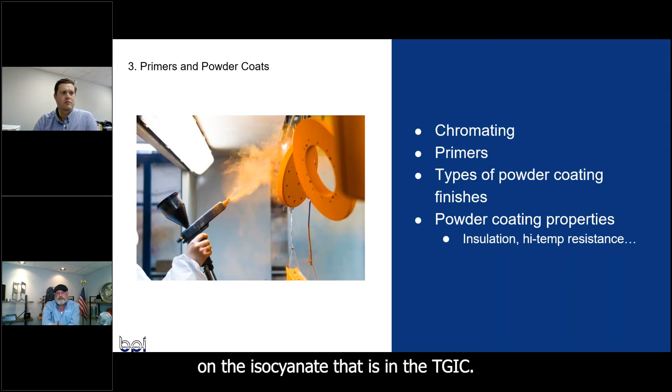There are powder coatings now that are very expensive, but they will last. They are AAMA approved, and they will last 30 years with no problem. So TGIC polyesters are the most popular powder that is made. Europe wants to back down on the isocyanate that is in the TGIC. That's what the I stands for, and we call it a TGIC-free polyester. Again, it is an exterior powder.

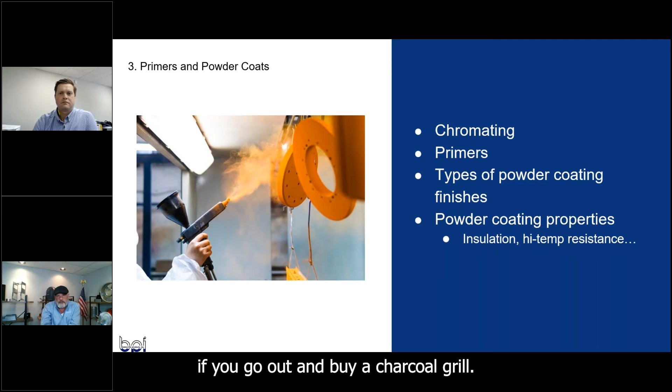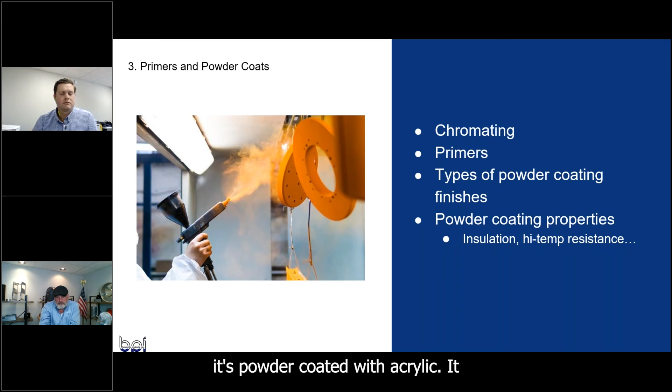There is an acrylic. The good news is acrylics last forever. The bad news about an acrylic powder is it will contaminate any other powder. So people that use acrylics, that's what they use, just acrylics. And that is like if you go out and buy a charcoal grill, and it's 2 feet square, 8 inches deep, more than likely if it's powder coated, it's powder coated with acrylic because it can stand the heat.

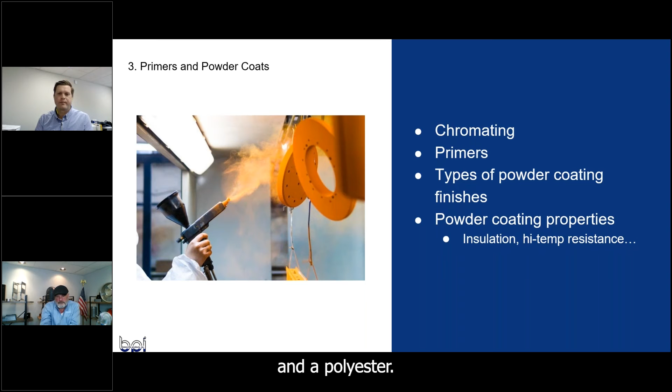Then there are hybrids. This is a blend of an epoxy and a polyester. If you have a powder coated desk in your office, that's hybrid powder. That's what the metal office furniture industry uses.

And then there are epoxies. Now, there are many epoxies. Epoxies are only for interior. If you put it outside, within 30 days it will chalk and start to lose its shine and its color. It is used a lot. It's called fusion applied epoxies.

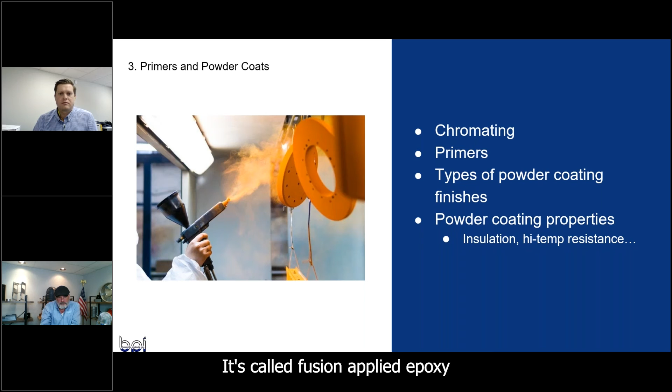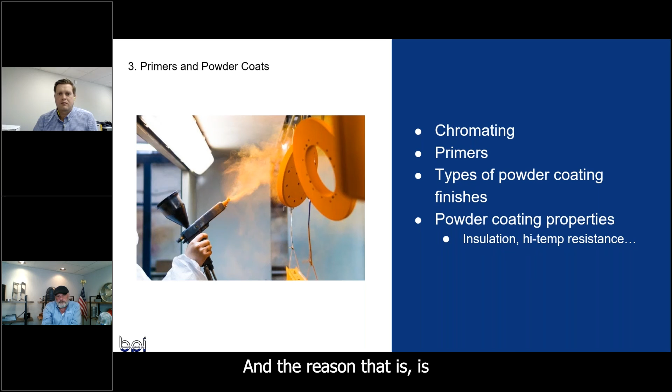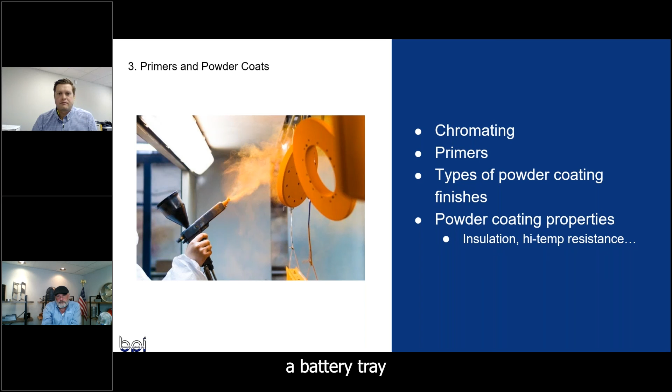As you're driving down the road and you look at a fire hydrant, that fire hydrant is coated inside with fusion epoxy. And the reason is that you can build that up to 20 or 30 mils thick. But again, it never sees sunshine because it's inside. Also, epoxies are very resistant to chemicals. And so a battery tray that batteries are going to set in would call for an epoxy powder.

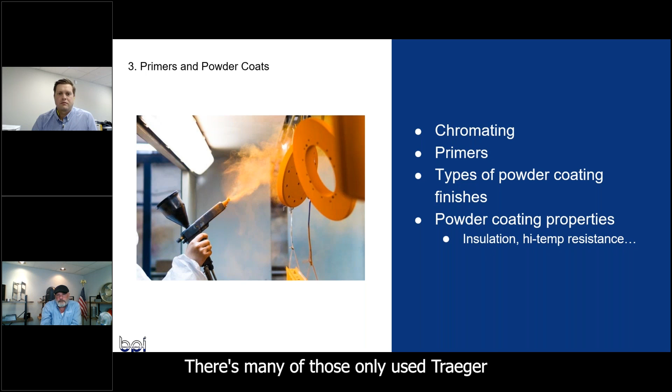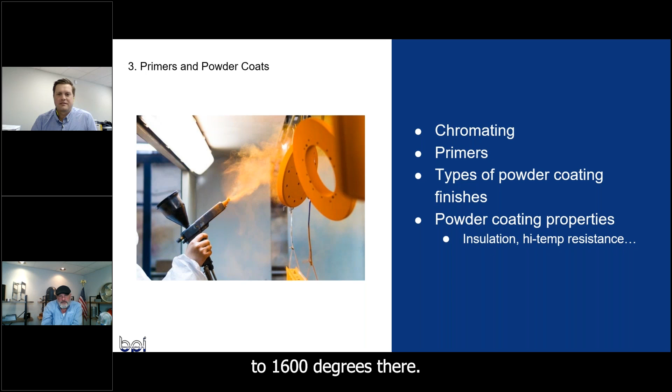There are high temperature powders now. Many of you are probably familiar with Traeger. That's a very popular pellet grill. There's many of those. I only use Traeger because that's the one my wife has. But that is coated with a high temperature paint that can withstand up to 1600 degrees. There again, if you're painting high temperature powder, that's all you can paint because it will contaminate all the other chemistries of powder.